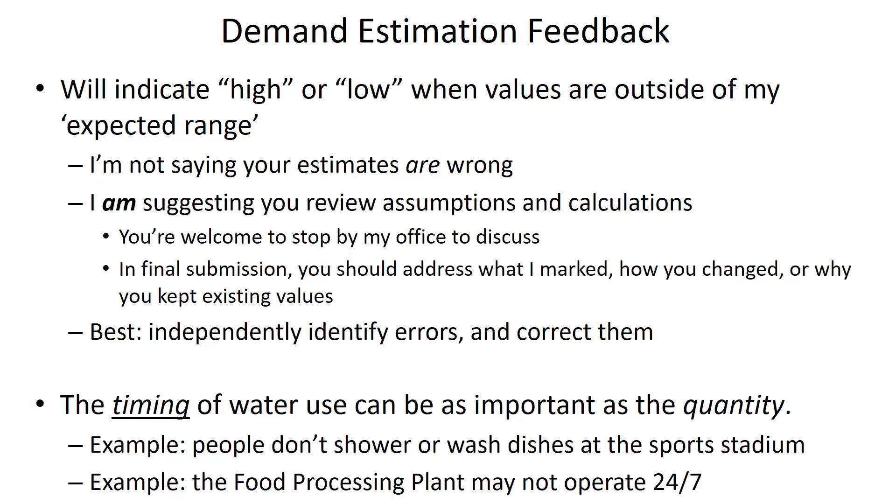You may have seen them around trying to hire new faculty members, and anytime one of them comes to campus, it's just murder on the things I want to be doing, which is looking at your demand estimation stuff. So I'm going to do that as quick as I can, but I regret it hasn't already been finished.

Phase 1 of the project you've submitted your draft for is basically answering the question: how much water is going to be used in this hypothetical development. Phase 2 could be summarized briefly as how big should the pipes be. It's an optimization process, not something where you just apply a size once and it's right the first time.

By optimize, what I mean is, remember there's a band of acceptable pressures. The minimum pressure should be 240 and the maximum should be 850. How do you pressurize the water in the network? What's causing that water to be pressurized?

Elevation head of what? You're right, there's a reservoir up on the hill. So if you put the reservoir low on the hill, there's not going to be much pressure in the network. But what if you put the reservoir too high on the hill? Well, at night, when people aren't using much water, there's a static head. When the flow rates are zero, the pressure at each point is just defined by the hydrostatic equation.

So if your reservoir is all the way up by the spring, for example, then your pressure at night, when nobody's using water, would exceed this maximum. So you're going to be juggling having the reservoir nice and high on the hill and making the pipes as small as possible, because the smaller the pipe, the more money you're saving. But if the pipe is too small, then during daytime hours when people are demanding a lot of water, the pressure could go below 240.

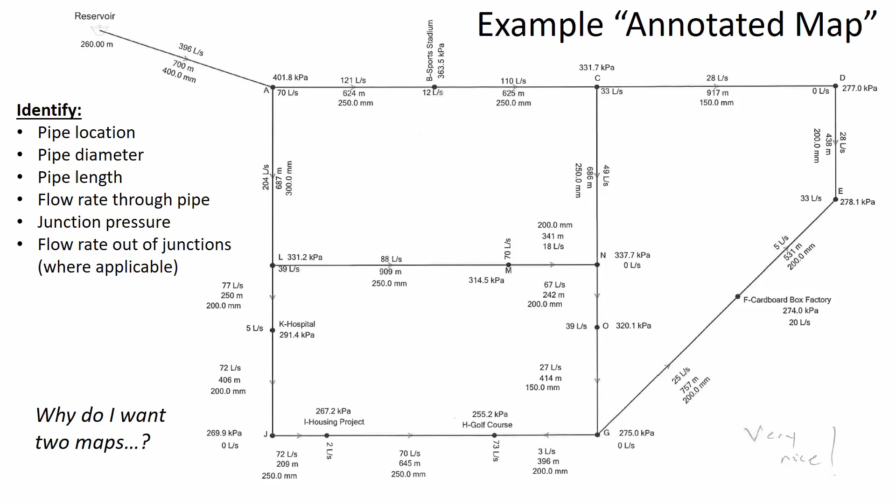Let's talk about open channel flow and specific energy. We touched on this in previous recorded lectures, back in early February, so it feels like a lifetime ago, but we talked about energy per unit weight of fluid. The energy equation differs for closed conduit flow compared to open channel flow. In closed conduit flow there is pressure head, elevation head, and velocity head. In open channel flow that changes to depth, elevation, and velocity head.

Specific energy takes the bottom of the channel as our elevation datum, so we're not worrying about the Z term anymore. The word 'specific' just means relative to the channel itself, so how much energy is there above the bottom of the channel? The only two terms remaining are the depth and the velocity head.

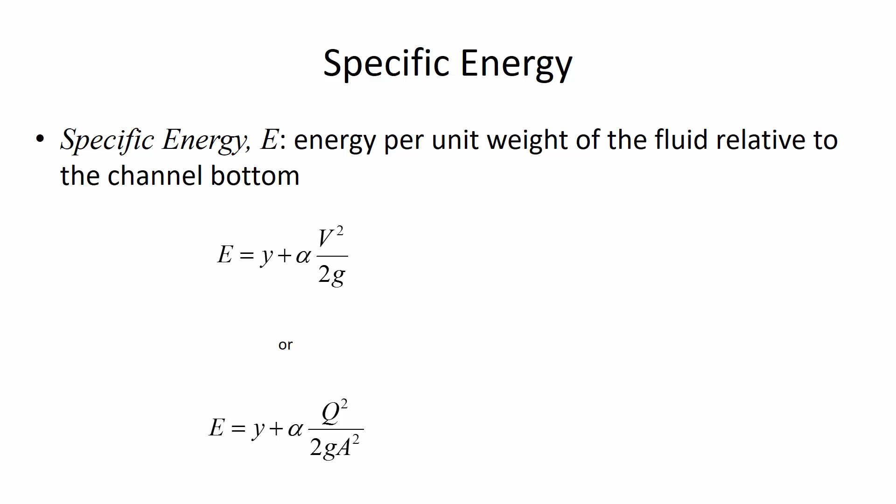One substitution we've made in the past: instead of velocity, it's sometimes more convenient to express it in terms of flow rate Q per cross-sectional area, since we don't always know the velocity but in some cases we know the flow rate, and we're solving for the depth y. If you're solving for y, it appears in the first term, and y is also one of the factors in the cross-sectional area. You'll see that a bit later.

Take a rectangular channel as an example. We want to put 10 cubic meters per second through this channel. It's 4 meters wide at the bottom and at the top since it's rectangular, so both lowercase b and capital B are 4. How many different combinations of velocity and depth could there be? An infinite number, because we could have a really shallow depth with water moving at high velocity, or a very slow velocity that would require a very deep depth to convey that same 10 cubic meters per second.

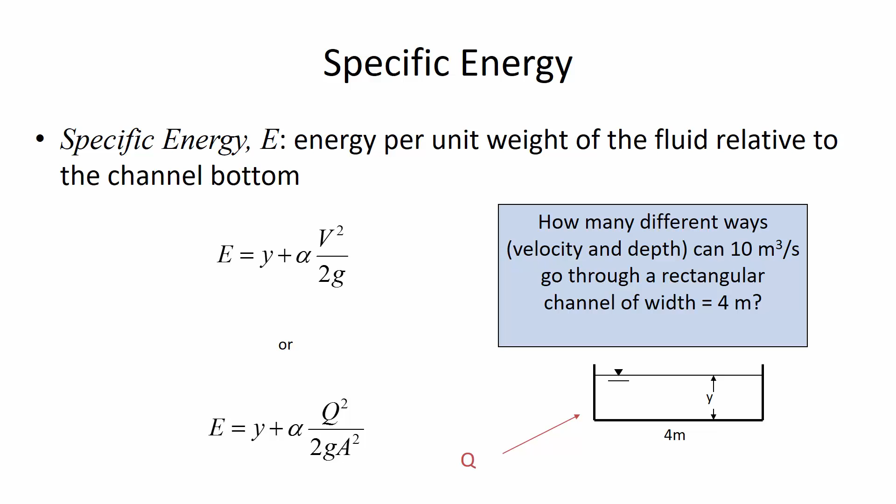We could create a hypothetical table, not showing all possible values, just to make the point that for a certain channel conveying 10 cubic meters per second, there's one end of the range with high velocity corresponding to a lower depth, and another end with low, slow-moving water that has to be deeper to satisfy continuity.

In this table, the cross-sectional area can be calculated as Q divided by V. If we do that calculation, we'd need a cross-sectional area of 1 square meter to get a velocity of 10 meters per second. On the low end of the spectrum, the cross-sectional area would be 10 square meters to get the same flow rate. That's how we calculate the area column. For the depth column, since it's a rectangular channel with bottom width of 4, the depth is just the area divided by 4, because area equals B times y. We already know B and A, so it's area divided by B, and in this case B was 4.

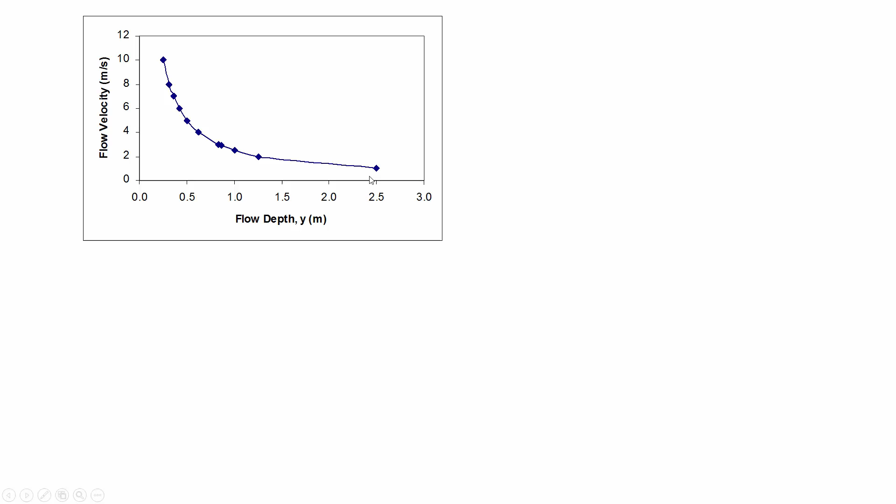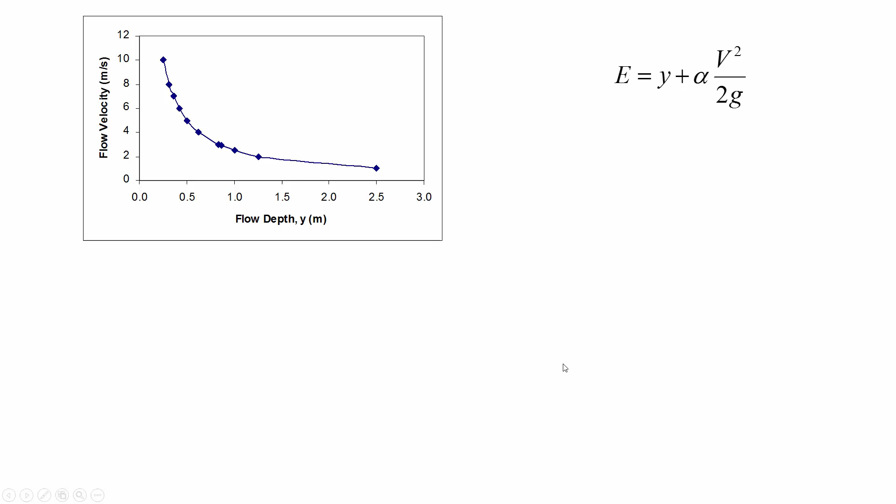The next graph is going to be a graph of specific energy. Going back to this table, I want to graph the specific energy as a function of flow depth. Remember that there was a minimum point, and here is that minimum point. This figure is really important.

You're going to be making figures like this in Excel in order to identify some things. Let's pick it apart and see what's so important about this figure of specific energy versus flow depth. It's saying that there's this minimum point where we had the lowest specific energy for a certain flow rate. And that corresponds to something we call the critical depth.

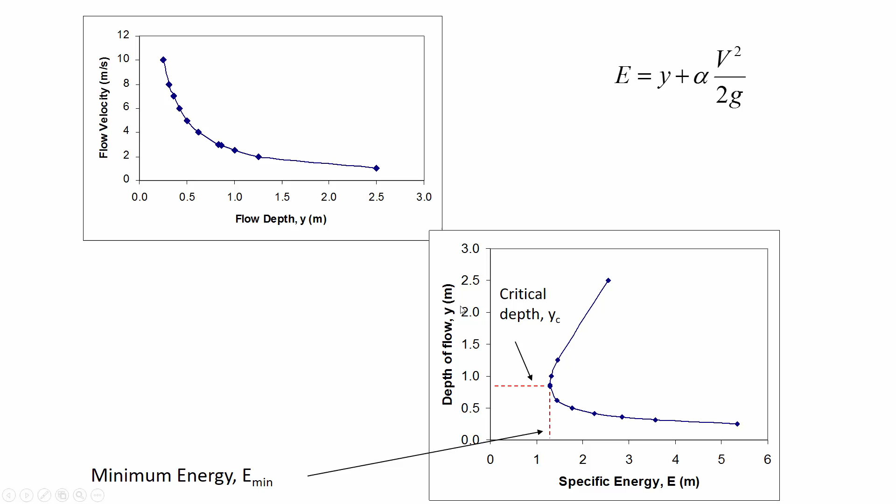You remember that you calculated the Froude number for the assignment that you turned in recently where you were classifying the flow regime. The Froude number tells you if the flow is subcritical or supercritical. Well, that's what this is related to, where we're saying the critical depth is a certain depth that the water can go through the channel, and the least amount of energy possible is when the water is flowing at that critical depth. And if we're looking for hydraulic efficiency, the most efficient way to convey a certain 10 cubic meters per second for the lowest amount of energy is at the critical depth.

Now, why are there so many different combinations of depth and velocity? It's because there's an infinite number of slopes that a channel could be at. If you pour 10 cubic meters per second down a really steep slope, it's going to be shallow because the water is going to be picking up a lot of velocity. But if the slope is relatively mild and shallow, like the Ohio River has a very shallow slope, then the depth is much larger because it's moving more slowly.

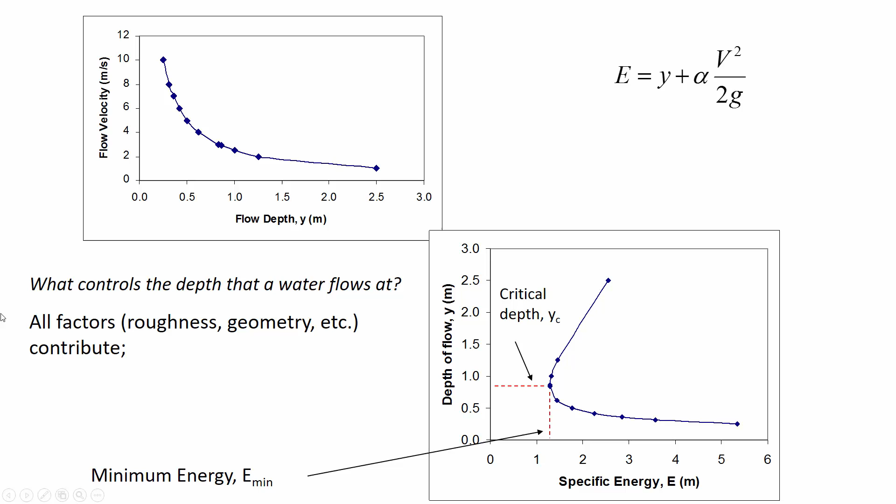So there are a lot of factors that play into that, including the roughness of the material, the geometry of the channel, and so on. But slope is the main factor that we can change and see this many different varieties of flow depth and velocity. So I want to pause for a moment and see if there are any questions so far.

Go ahead. Use what? When flow is scouring something?

The main equation we'd use for that is the shear stress equation, and we'd then need to compare it to the cohesive strength of the material the water is flowing over. This isn't really so much related to scour, but it is true that when you have a really high flow velocity, you're going to see more scour compared to a lower flow velocity.

The region below this critical depth, any depth less than that, is a supercritical depth because the water's moving fast. Any depth above the critical depth is a subcritical depth because it corresponds to a lower velocity.

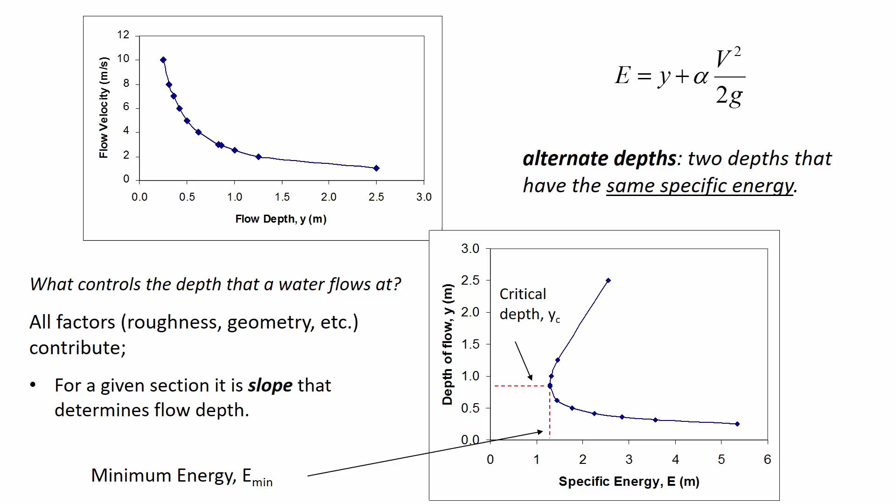So here's what I was just saying. The minimum specific energy corresponds to the critical depth, and when your flow depth is larger than that, conditions are subcritical. It's a little bit confusing for students, I've found, to have the flow depth greater than the critical depth be called subcritical. They sometimes accidentally flip the sub and the super because of these signs.

I put a little note in parentheses there to help you keep it straight: subcritical flow is because the water velocity is slow, and you'd have to have slow moving velocity if the water is really deep. Think that the deep water is going to be because you have a shallow slope, and so the water's not moving very quickly when you have a shallow slope.

But when you have a steep slope, like that spillway in California, it's a very steep slope. Conditions on that spillway are supercritical. So the depth of flow on that spillway would be less than the critical depth, fast velocity.

You can also talk about the top channel width, because for a trapezoidal channel, the top width of the channel is going to be changing. Now it won't be changing in a rectangular channel. If you have critical flow, subcritical, or supercritical, the top width is always going to be the same in this example of the rectangular channel. But here, if you have a trapezoidal channel, then the top width is going to be changing.

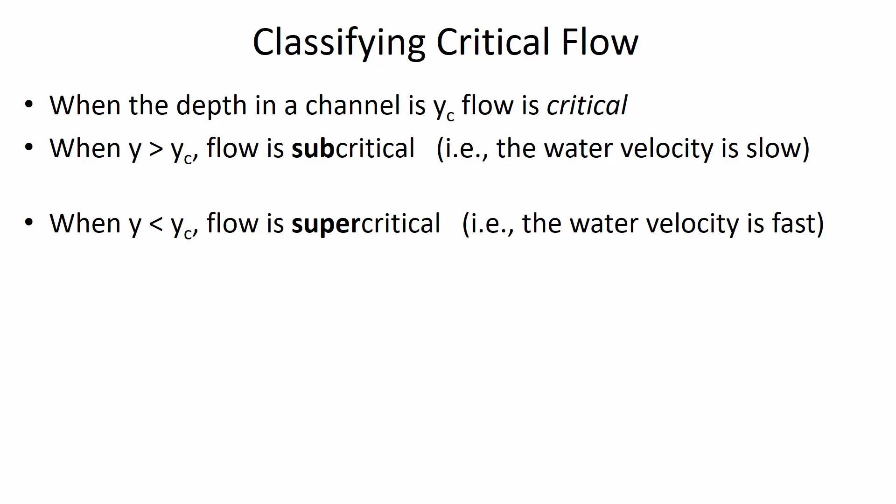Here's one of the formulas where previously it had the capital T instead of the B. This is the formula for the Froude number. In the first term it has this D, which means hydraulic depth, the cross-sectional area of the channel divided by the top width, capital B. We're going to talk more about the Froude number and how to calculate it throughout today.

Froude number of less than 1 means conditions are subcritical, and Froude number of more than 1 means the flow conditions are supercritical. You can substitute in your depth of flow into the formula for cross-sectional area, and if you know the flow rate and the corresponding top width B, you can put all of those flow conditions into this equation and find the Froude number. If it's less than 1, that's subcritical. More than 1, it's supercritical.

Or you could say, what is the critical depth? At the critical depth, the Froude number is equal to 1. Substitute 1 into the Froude number equation, and you could solve for y, since y could be an unknown. Then you'd solve for the critical depth.

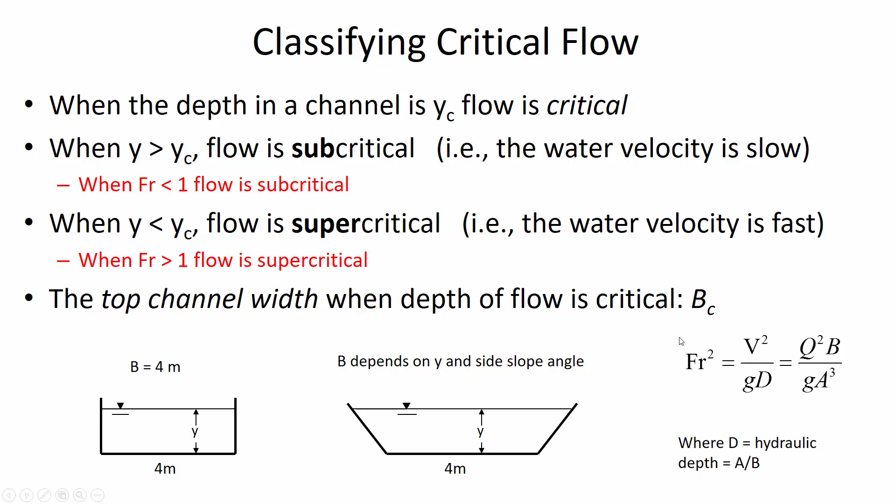Okay, now more about this hydraulic depth parameter, D. If we have some trapezoidal channel, the hydraulic depth is the cross-sectional area divided by the top width. For a rectangular channel, the top width is the same as the bottom width, so the hydraulic depth is the area, B times Y, divided by the top width, B. So for a rectangular channel, the hydraulic depth is equal to just the flow depth.

The reason this is significant is that you may have a rectangular channel, but also channels that are very wide, like rivers that are shallow and wide, behave as though they're rectangular. So say we have a channel that's relatively shallow with a width that's very large, like 20 times more than the flow depth. If the width is more than 20 times the flow depth, then you can approximate this irregularly shaped channel as a rectangular channel.

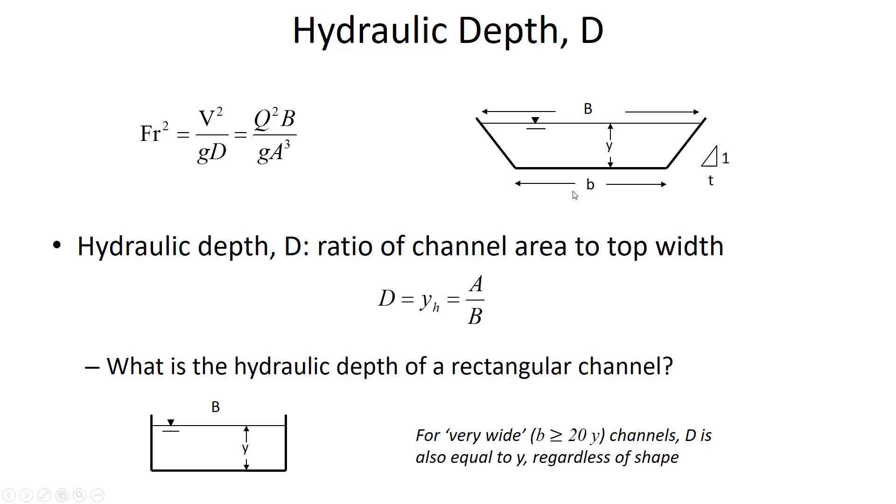All right, so back to the same figure from before. Remember, our critical depth was 0.866 meters. When we had the table, I think we found that Y sub C was 0.866 meters. So if you have a flow of 10 cubic meters per second and the depth is 0.25, is that supercritical or subcritical conditions?

Super or sub? When you have this minimum specific energy point, and now we're asking about the depth of 0.25, so what if Y is less than YC? Is it super or sub? It's super. That's right, supercritical.

And we could validate that by actually calculating the Froude number. We put in the flow rate of 10 cubic meters per second, square it, times the top width of 4 meters, over G times the cross-sectional area. The cross-sectional area is 1, because it's the 0.25 depth times the 4 width. So the Froude number is greater than 1, and that's another way of confirming that the flow conditions are supercritical.

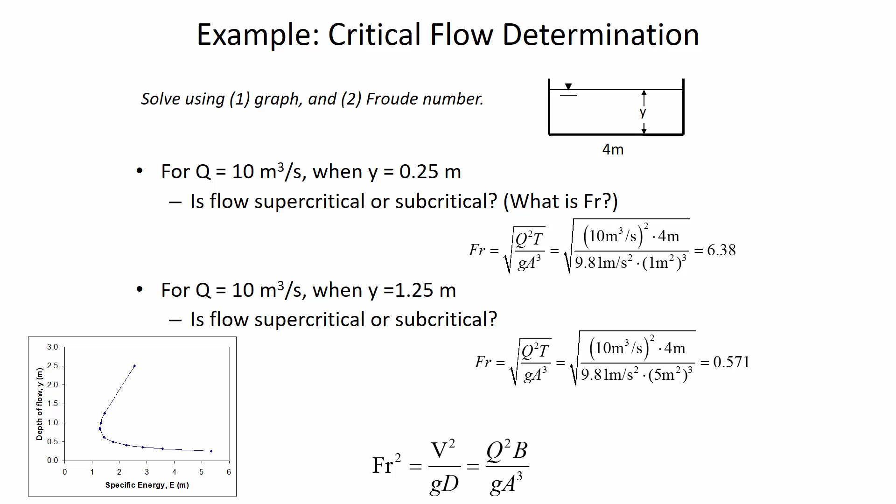All right, so an alternate depth is defined as a depth that has the same amount of specific energy, but is different from the depth you're at now. Imagine drawing a vertical line through the specific energy curve - there are two different depths that have the same amount of specific energy. So you could have the water moving at a high velocity with a small depth, and that could have the same specific energy as different flow conditions with a larger depth but low velocity.

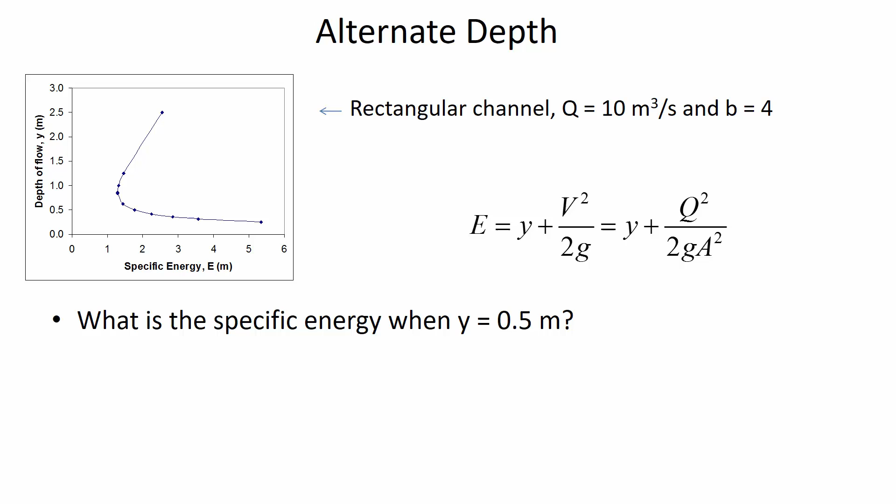So here's our curve, that same rectangular channel carrying 10 cubic meters per second. What is the specific energy when the depth is 0.5 meters? I'd like you to calculate that - this is an important example, so we'll take the time to do it. Find the specific energy when we've got a depth of 0.5, and then once you solve for E, find the other depth that also has that same amount of specific energy. You'll be substituting - in the first part, calculate E.

So let me summarize that here on the board. Step 1, calculate E for the depth equals 0.5 meters. Step 2, for the same E, find the alternate depth.

What that means is you're going to have E equals y plus Q squared divided by 2gA squared, and now area is 4y. So there's more than one root for y that satisfies this equation once you solve for E. I think there will be 3 roots: one will be negative, one will be the depth you already had, and the third root you find is the alternate depth we're looking for.

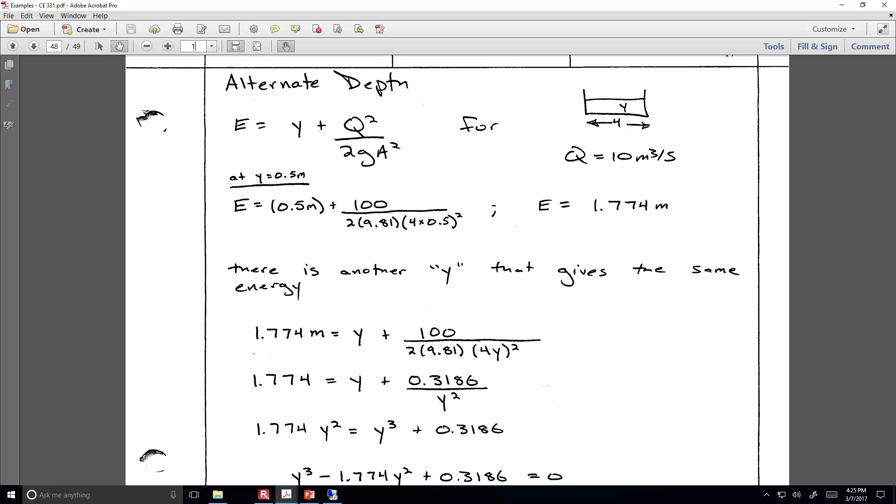Hopefully you found that the specific energy under those flow conditions is 1.774 meters. So what we're looking for is some other depth besides 0.5 meters, some other depth out there that has the same amount of specific energy, and that's the alternate depth.

Just to give you a preview into the future, the reason why we're interested in alternate depths is it's related to hydraulic jumps. When you've got conditions where the flow can't be sustained in supercritical conditions, it's going to have to jump down to subcritical flow, and it'll go looking for its alternate depth, the depth that has the same amount of specific energy.

So here's what we do. We substitute in that value for E, and then we're solving for the unknown Y. It comes out to be a cubic equation, and just as an olive branch, let's try and solve that cubic equation on the Casio.

All right, so we go modes 5, 4 for cubic. So then our equation here was 1, and then minus 1.774, and then 0.3186. Did I do the wrong thing? Oh, yeah, okay, so Y was 0. We gotta go back over here, 0. And then this is the one where we say 0.3186. Let's see, fingers crossed if this works. There's a negative, here, this one? Isn't it positive 0.31?

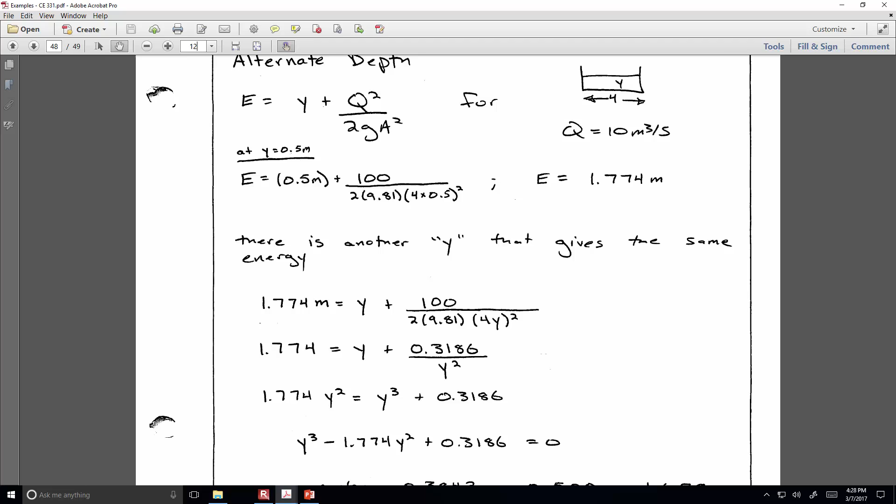All right, so the roots, that's the one I'm looking for, 1.66 meters, because the other roots it's going to tell me are the one I already knew about, the 0.5 meter depth, and then some negative root. The flow isn't going at negative 0.38 meters, so it's that first root, 1.66, that's the one I'm interested in. So the alternate depth is 1.66 meters.

Everyone feel good about that? You feel really good that since I did it on Casio? You couldn't care less, I know. All right.

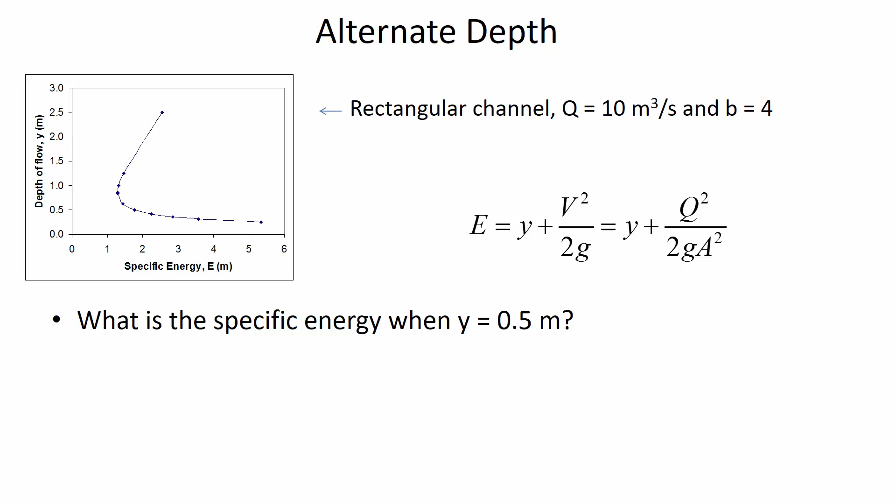Critical conditions are when the flow is going at the minimum specific energy. Now you may be wondering where the equation for the Froude number comes from. Remember, when the Froude number is equal to 1, that is defined as critical conditions. Froude number more than 1 is supercritical, Froude number less than 1 is subcritical.

So consider, here is our equation for specific energy. If we take the derivative of that, say dE/dy, the y just goes to 1, and now we've got dA/dy here. Notice that the slope of this at the minimum specific energy is straight up and down. So when you're in the subcritical range, you've got a positive slope. When you're in the supercritical range, you've got a negative slope. But the line is straight up and down at the minimum specific energy. That's kind of where the Froude number equation comes from, graphically solving this curve of specific energy. At critical conditions is when it's going to be straight up.

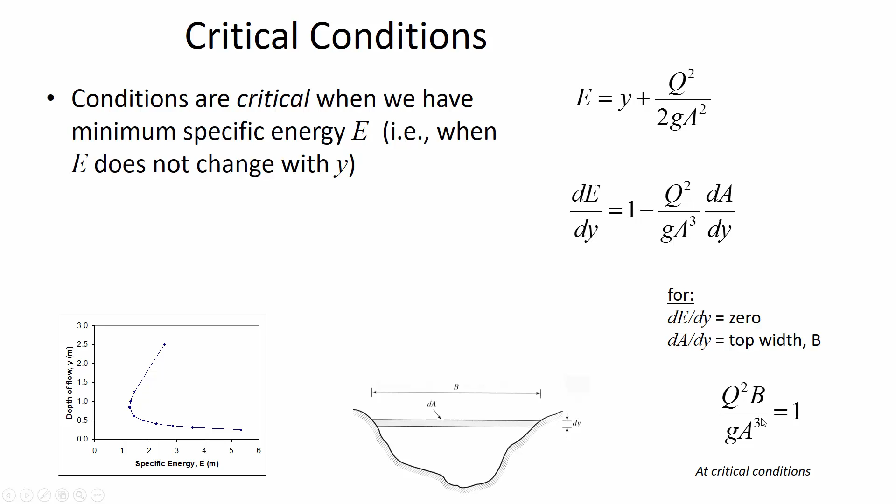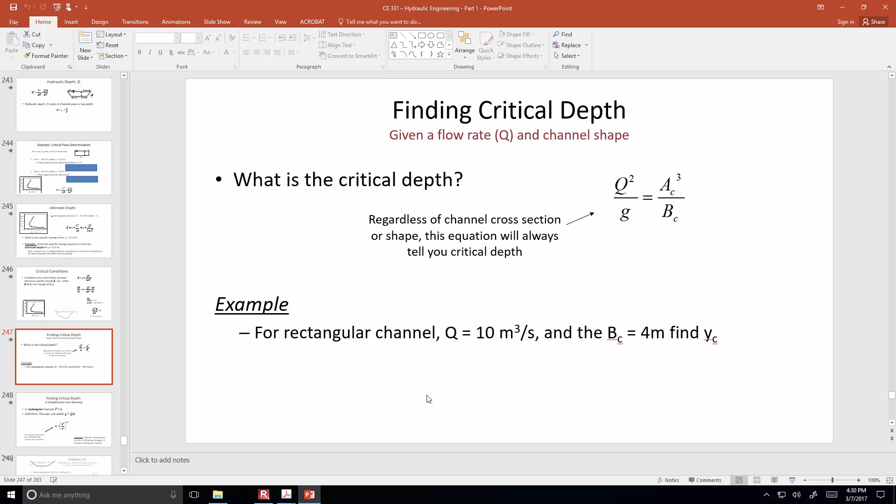You can solve for the critical depth by changing this equation around and saying that you've got the critical cross-sectional area and the critical top width, and this equation will always work, it'll always give you the correct critical depth. For an example of how to do that, consider the same channel we've been talking about before, the 4-meter width and the 10 cubic meters per second going through it. We could solve for YC. Let's just take a look at that so we can spend the rest of our time on one other thing, here's finding that critical depth.

Okay, so we had the flow rate squared divided by G. The cross-sectional area under critical conditions means the width is 4, and then it will be some unknown critical depth, and the top width is going to be 4, so we can just substitute in the 4 for that. You can rearrange the equation to solve for YC, and it turns out to be the 0.86 value, that depth that we saw in the spreadsheet table earlier.

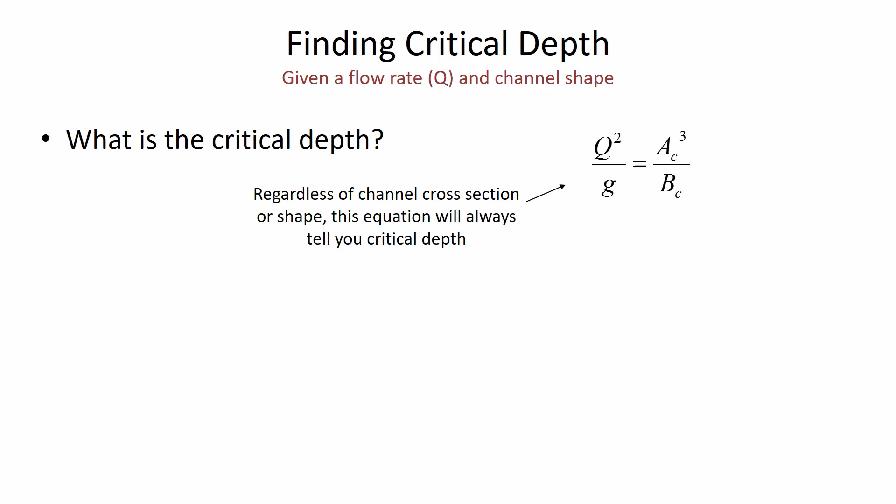So you can use this formula under all conditions, but there's actually an easier way than using this formula. If you've got a rectangular channel, then the top width is equal to the bottom width, I've switched over, we're going to say capital B. You can calculate something called the flow per unit width when you have a rectangular channel. You can't calculate that for other types of channels because the width is changing as a function of depth.

But when we had this channel that was 4 meters wide, the rectangular one, and we had a Q of 10 cubic meters per second, lowercase q is capital Q divided by B. So that's 10 cubic meters per second divided by the channel width of 4 meters. And so what that tells us is that there would be, I think in this case...

2.5 cubic meters per second per meter of width. So basically what you're saying is divide this channel into segments, and you want to know how much flow is going through each one of those segments on average. Now the reality is that more flow would be going through the center part of the channel than through the edges, because the edges are exposed to the frictional contact with the actual channel surface.

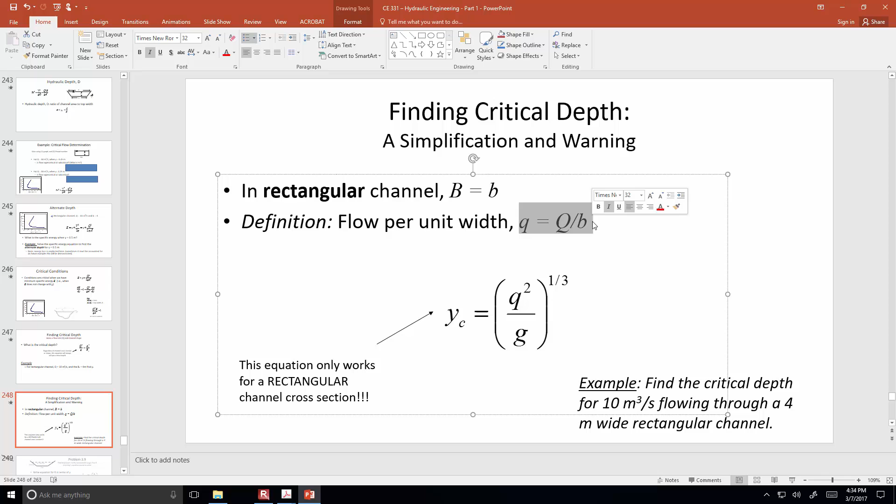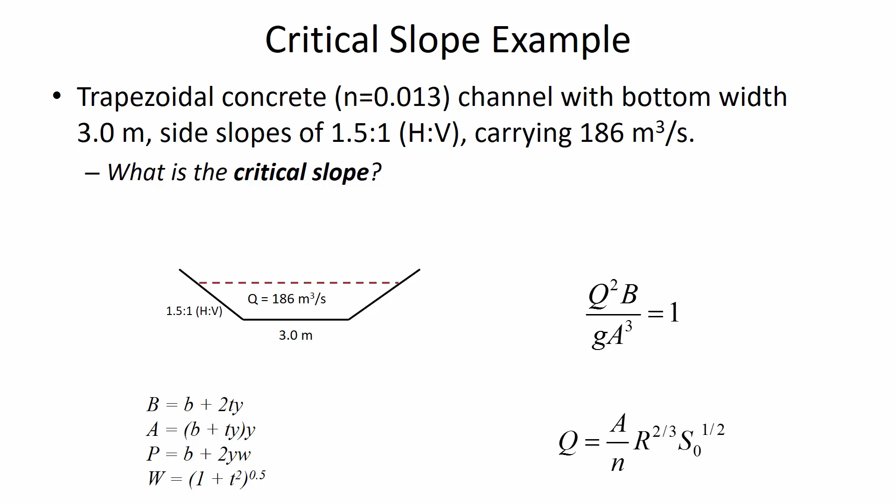So you know the flow rate, and we want to find out the slope that would cause the y sub c depth.

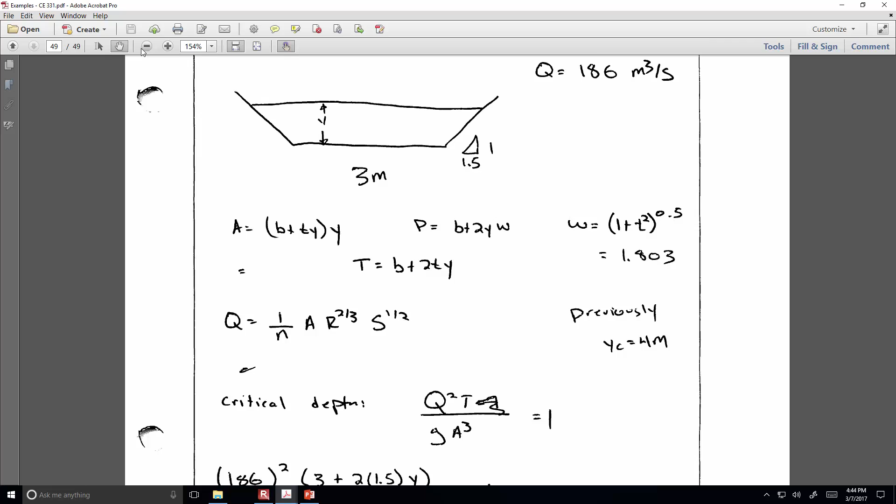Okay. When you're plugging in the area, it's b plus ty quantity times y. So wouldn't it be 3Y plus 3 times 1.5Y? For the area? Yeah. Let's see. Oh, yeah, you may be right about that. Let's see. Area. Yes. Thank you for noticing that. You're right. Yep. So that, right? One more.

All right. Thank you. Okay, so it turns out that the critical slope is 0.15%. So that means that any channel that's conveying this much flow, and it has the dimensions of 3 meters wide and the trapezoidal channel with the 1 to 1.5 side slope, any channel that's steeper than that, you're going to have supercritical flow going through the channel. And if the channel slope is less than this, then that would cause subcritical flow.